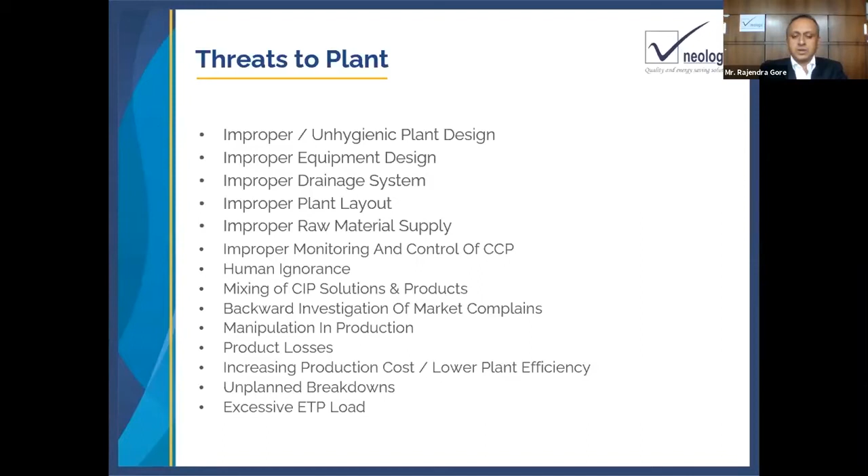Automation cannot play a big role in these, particularly basic design. But these are the factors where automation really is playing a very important role. Improper monitoring and control of CCPs is very important. Human ignorance is something you cannot avoid. It happens; we are human beings.

Mixing of CIP solutions into the product is a big threat to the plant. Backward investigation of market complaints is a big threat. If something happens in the market, how to identify and check what is going wrong is very difficult nowadays. Manipulation in production is also a concern for dairy plants. Product losses, increasing production cost, low efficiency, unplanned breakdowns, excessive ETP load. These are the threats to the plant.

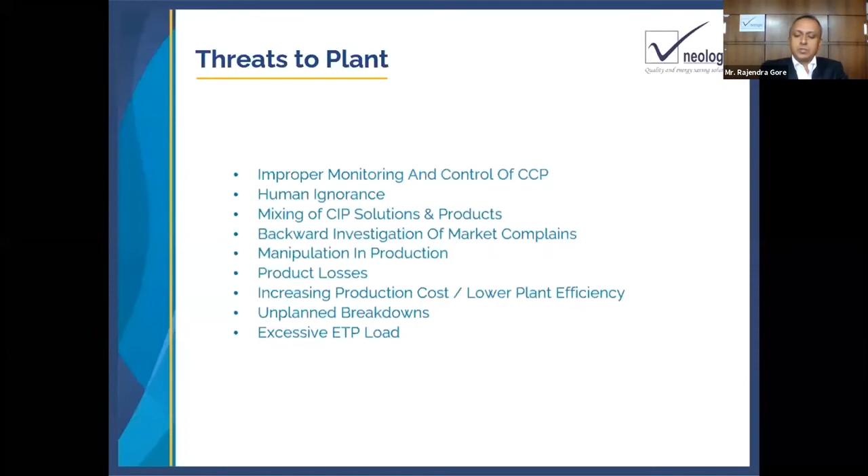Let us see now the role of automation in food safety, how automation plays an important role in reducing these threats in the plant. So why automation for product safety? For product quality, as I mentioned, the CCPs are properly monitored and controlled with automation, consistently, without fail, 24 hours, and no manipulation happens.

So that's an important role automation plays - it reduces operator dependency, since automation is independent of the skill of the operator. It performs very consistent operations with safe interlocks in place. Even if the operator decides to make a mistake, automation will not allow it.

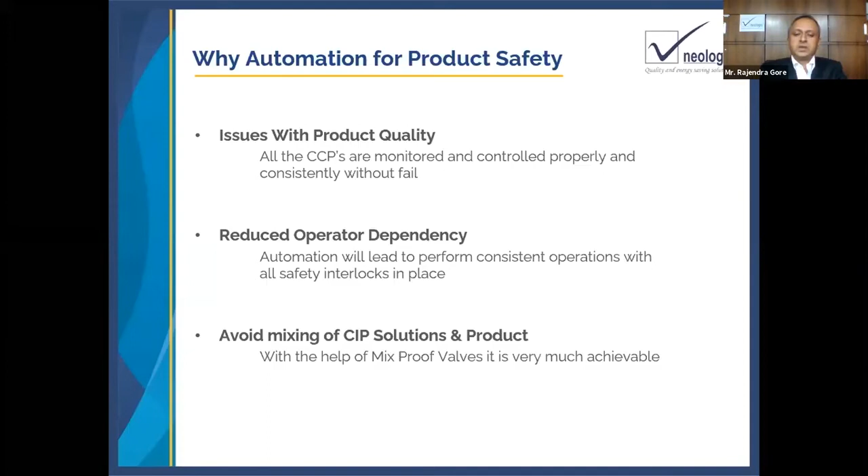It avoids mixing of the CIP solutions and product. This is important - special valves take care of avoiding this mixing and simultaneous operations. This is the traceability I was talking about, the backward investigation. If something happens with the consumer, there is a proper system in automation which can track from the consumer back to the dairy farm, with different unique IDs inside the automation.

It avoids manipulation in the production and QC. This is very important. Otherwise, the operator can fill whatever data he wants on the log sheets. This will not happen in automation, since automation directly senses from the field and stores it in the database, so no manipulation happens.

Then proper reporting is possible. Reduced production losses, since manual operation takes a lot of time. In automation, just by one click, the operations can happen very smoothly.

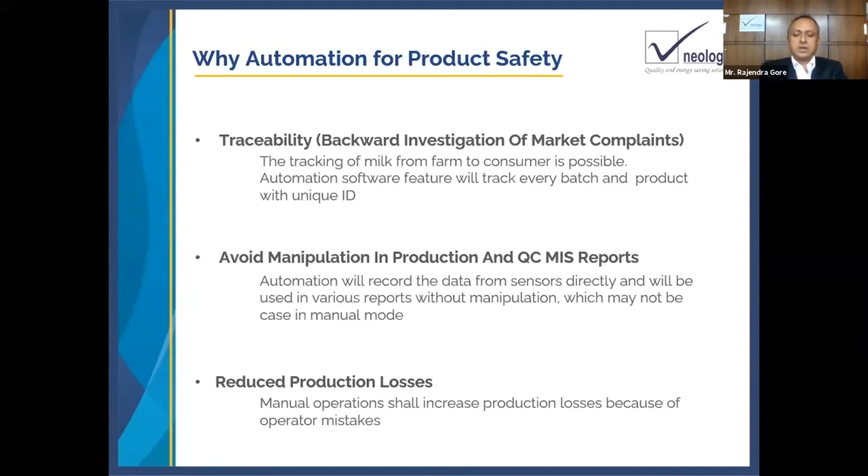Low plant efficiency is something automation addresses - utilization of the equipment happens very properly, with reduced unplanned breakdowns. Automation will prepare the maintenance schedule for the dairy, which will help reduce the ETP load.

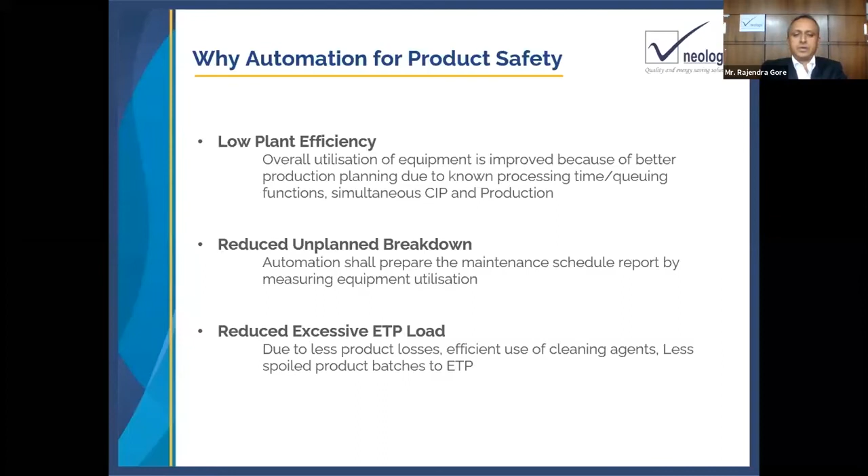So here is the Neologic vision for food safety. We commit to provide automated processing solutions for food industries for safe food. Our solutions are simple, hygienic and automated, and at Neologic we meet all the requirements of food safety in our plants.

As I mentioned, let us see these typical automation software features that Neologic offers and how they relate to food safety. I'll explain this in one minute.

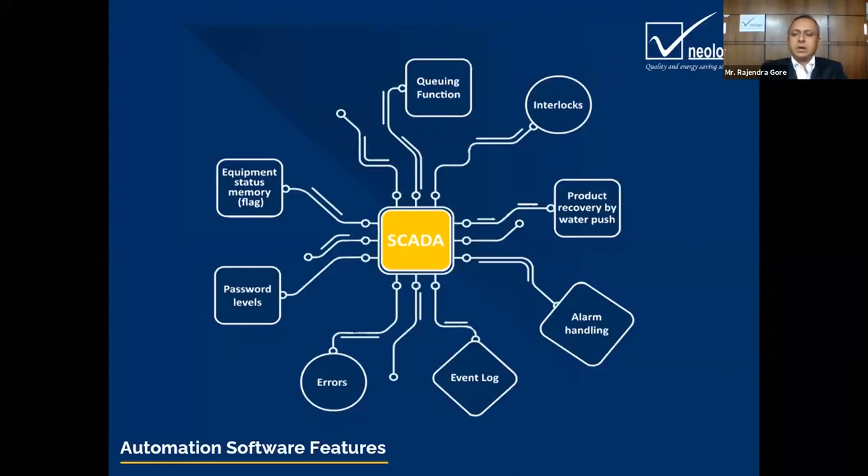Queuing function - when one silo finishes production, automatically it takes over the second silo without stopping, which reduces time and increases efficiency. Interlocks relate to preventing operator mistakes. Flushing improves productivity and reduces ETP load. Alarm handling, event logs and errors relate to reporting. These automation features, with these basic capabilities, help us achieve product safety to a great extent.

Let us see very briefly what Neologic does in automation. We execute many automated dairy projects for our customers.

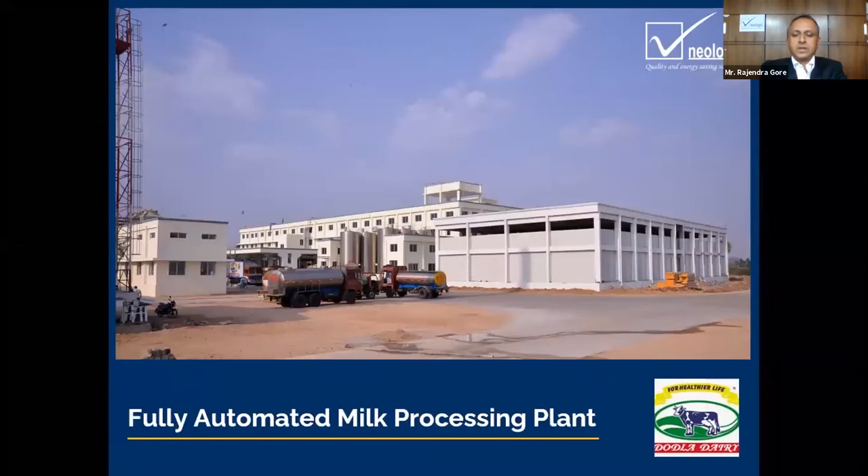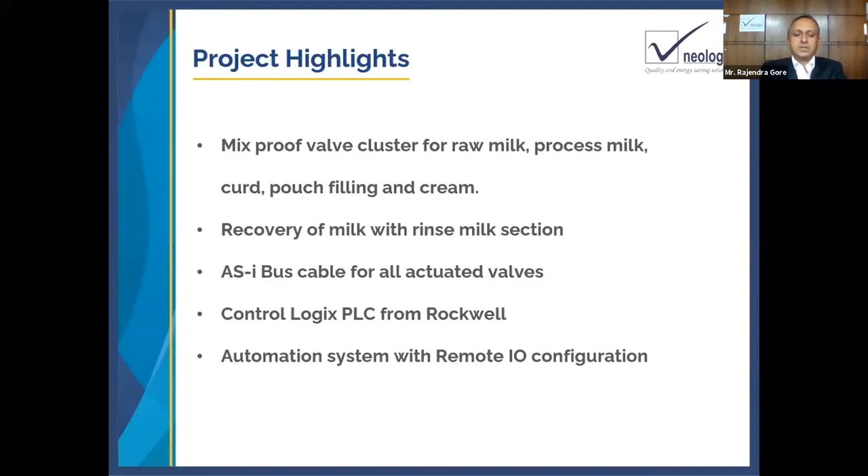This is one example - the automated dairy plant we supplied to Dodla Dairy in Hyderabad. These are the highlights: the plant is fully automated with mix proof valve design for processed milk and all byproducts, with recovery of milk using AS-i bus, valves, the latest control technology, and IO configuration.

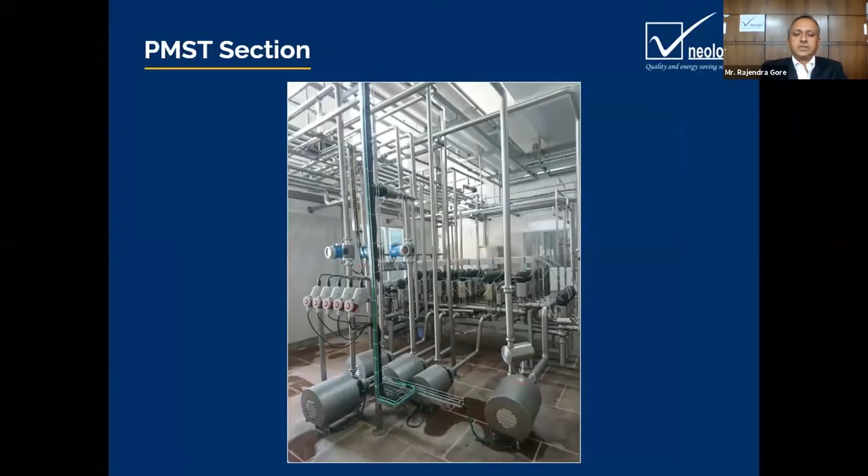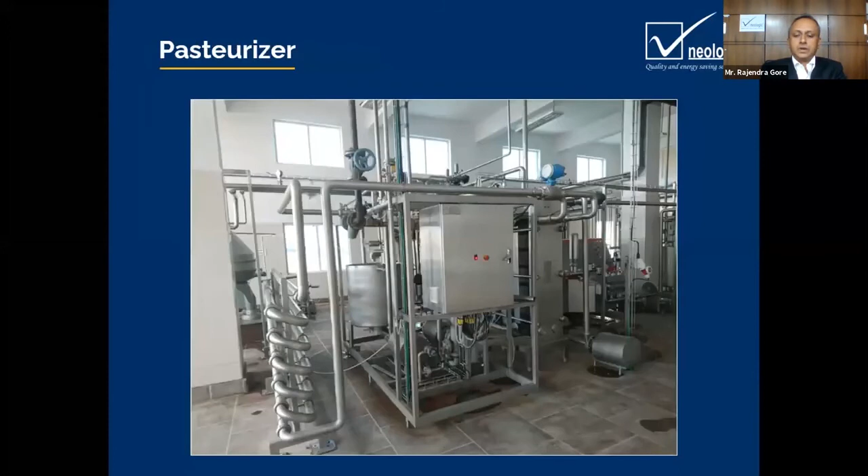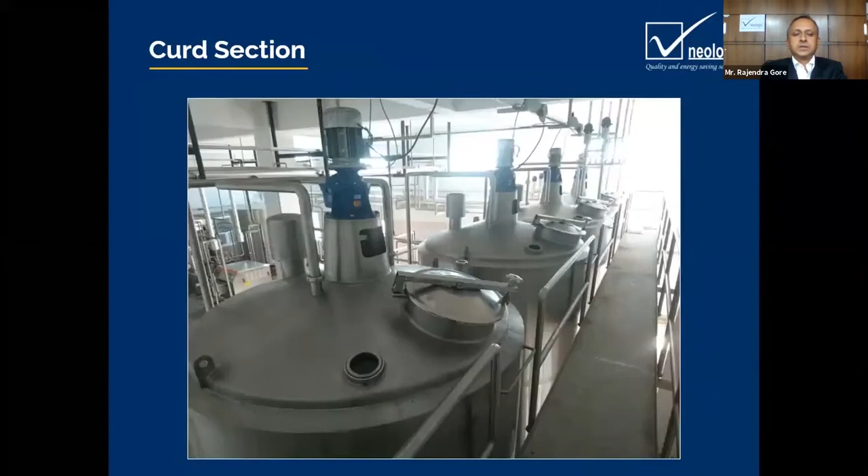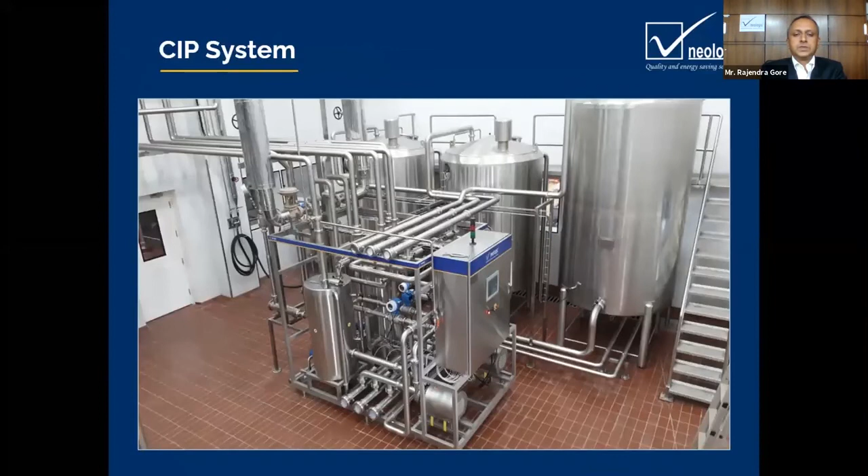I will go through the photographs quickly. This is the raw milk handling section, this is the pasteurized milk handling section. This is a typical valve cluster design which helps isolate the milk, CIP solution and product. The pasteurizers pasteurize the milk. This is a photo of the process hall - cream handling section, curd handling section, ice cream section. Rinse milk is very important in dairy, and the cleaning system is important. All operations happen from the central control room.

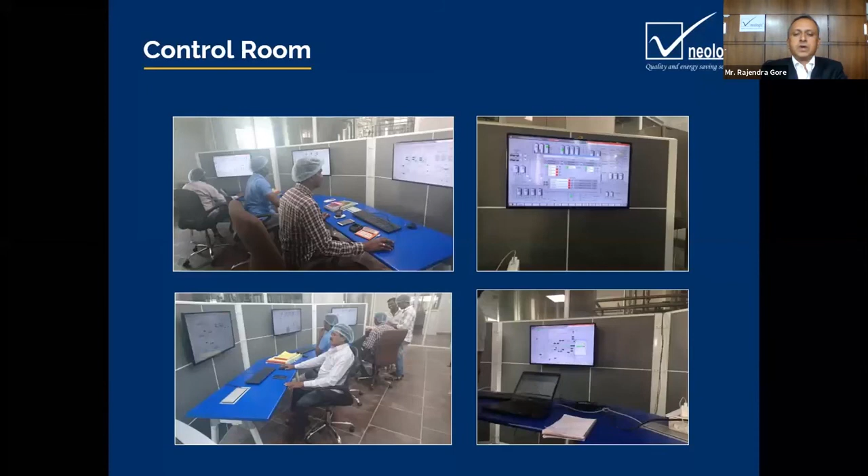Our automation is very well versed and Industry 4.0 compatible.

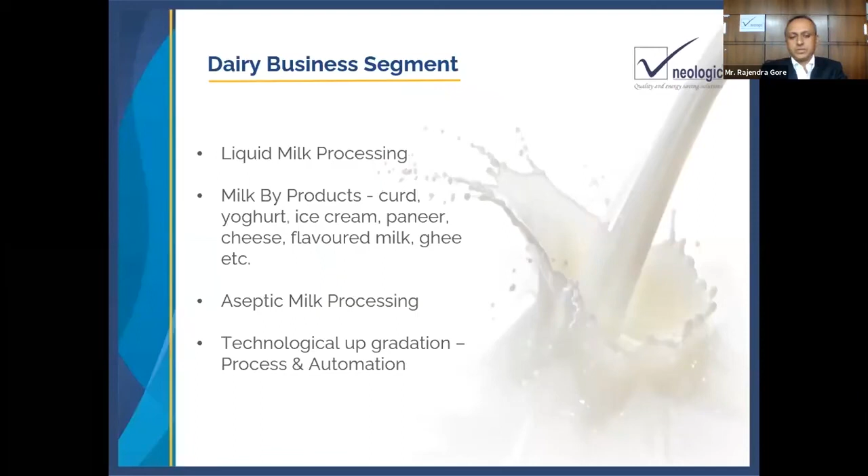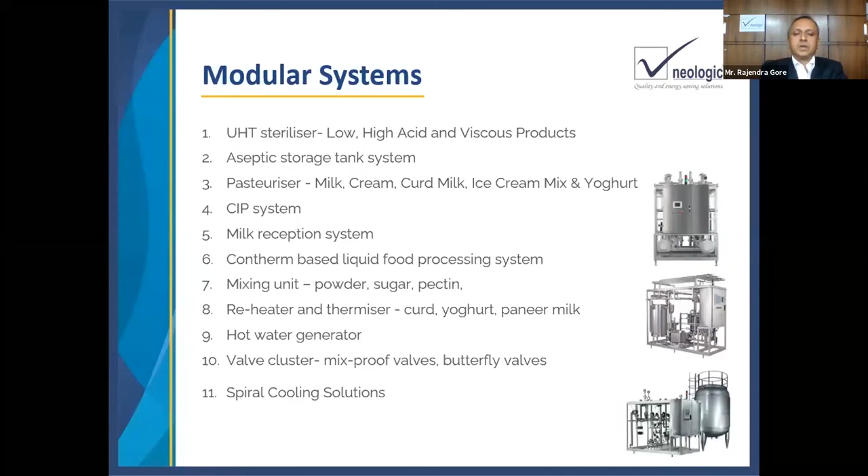We try to build every process in modular form, so we have many modular systems which help greatly to maintain the quality of equipment and quick execution time.

We have the entire infrastructure needed to execute big projects - an SAP-based system, manufacturing facility with ISO certification, good technical staff, different software needed for design. We have standardized automation libraries, regional presence, and very structured competence mapping for developing our people.

I'll close with one statement to all my friends - automation is something very important for the dairy industries. When the revolution happened, the main focus was to increase dairy production. Now there will be more focus on food safety, and that's where we play a very important role.

To execute such automation systems for brownfield projects or existing plants where millions of liters of milk are handled every day, every hour, is very difficult. It is crucial to upgrade the plant with a fully automated system, and that needs a lot of competence, process knowledge, and automation expertise. Neologic is well equipped with that, and we do such work every year - many projects.